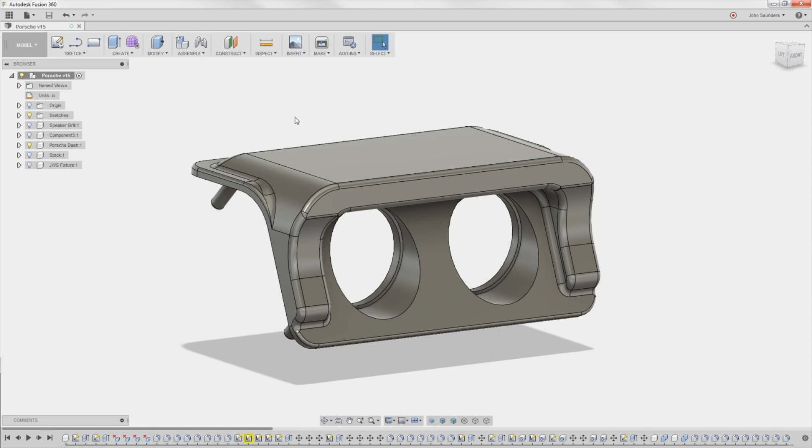So Keith, nice job. Unfortunately, it's so good that it's really got me stumped because Keith says, now I want to make the thing. So again, if you saw, we did an earlier video where we started talking about this, but these four plastic pins would kind of push into the dash on his Porsche 944. Here is, I believe this is the factory one, or maybe this was an aftermarket one that he bought as a test fit. And here were his original sketches.

So you can see the four holes, or the four legs, and some of the gauges that he's going to put into the one that he's going to make. And then there's the empty cavity, which, again, I don't know what was in there before. Maybe it was a radio. Keith will know.

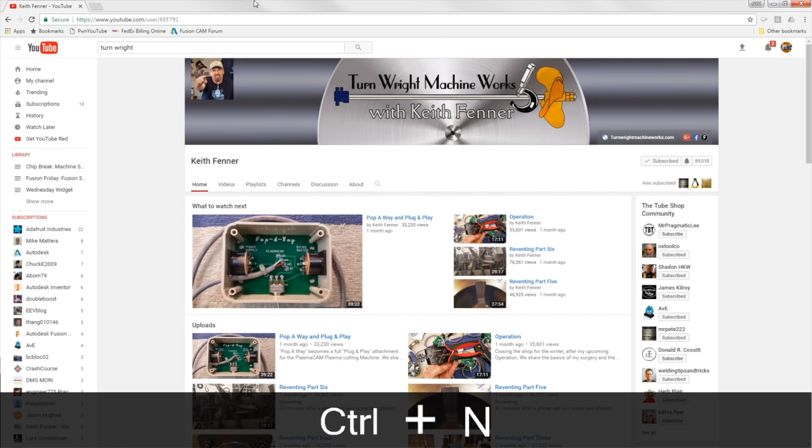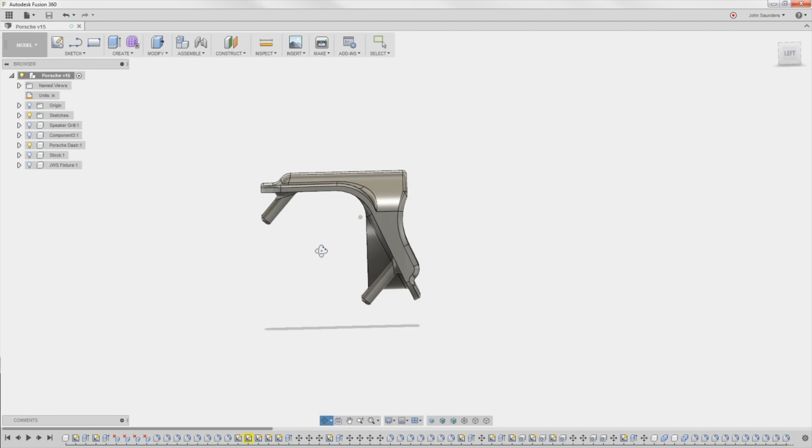The task at hand today is to help Keith understand the cam. And this is tricky. So I had to spend some time thinking about it. And one of the things I've learned that's a good mindset is try to remove the most material in your first operation. Now, that doesn't mean it's a steadfast rule, but it's generally the way to go. And I was thinking about this, and I thought, okay, so we've got to machine this big cavity in here, and then we'll have to machine this area up here, and then we'll have to machine this area up here. So I think it's a 3-op part, and that is what I've concluded.

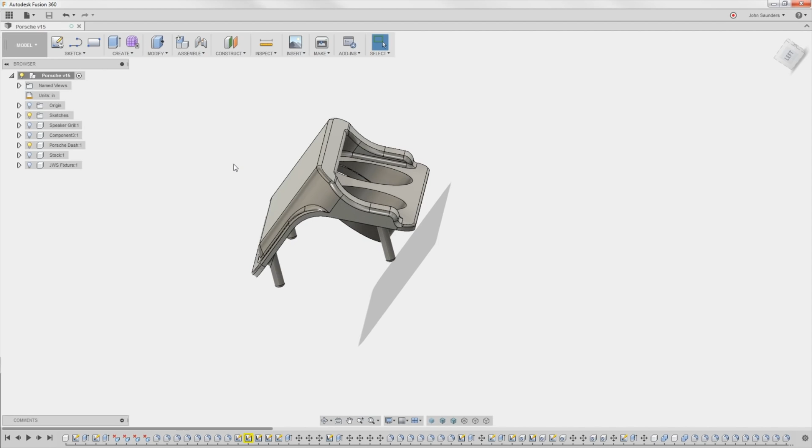But let's walk through, and folks, this is going to be a little bit of a longer video because I really want to take my time and walk you through how I think we're going to tackle it. And this is really to help you and to help Keith understand how to get started. It isn't necessarily going to be the cam or the code that he runs, but here's the thing, folks, we're going to actually ask you at the end for your help here. Keith has done a lot to give back to the YouTube and machining world, and hopefully this is our chance to give back to him because I'm not sure I'm coming up with the best strategy here. But let me show you what I got.

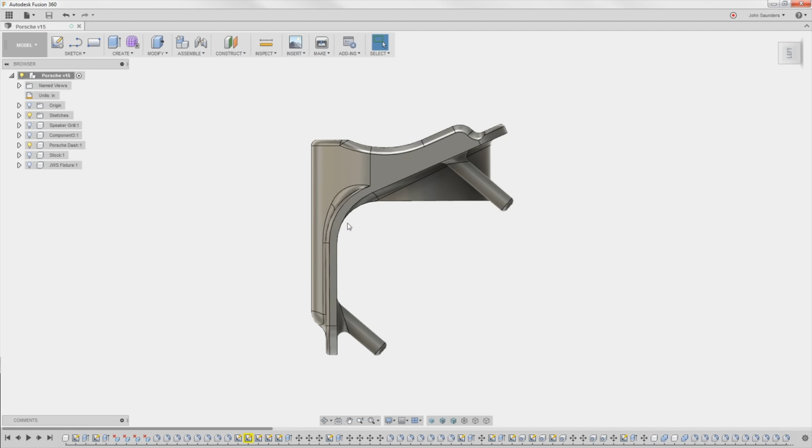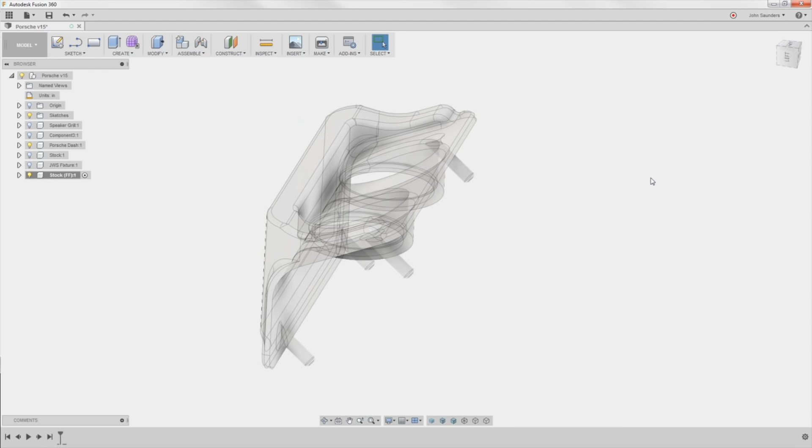First thing I want to do is right-click, New Component, and I'm going to rename it Stock for the Fusion Friday. But we're going to model up the piece of stock for a couple of reasons. The first is I need to figure out what to buy or what to tell Keith to buy. So the stock component is active. I'm going to hit R for rectangle, and I'm going to click that plane right there.

So I can't click it from this view, but if I hold my mouse over that area and then click the left mouse button, the normal mouse button, and hold down, I get this pop-up which gives me a few options. I want that YZ plane, which I don't always remember that it's YZ, but it pops up in the highlight, which is good. So now I'm sketching a rectangle on that plane, and you know what? The problem with a rectangle is it's not really the shape that I want. It's kind of oriented the wrong way.

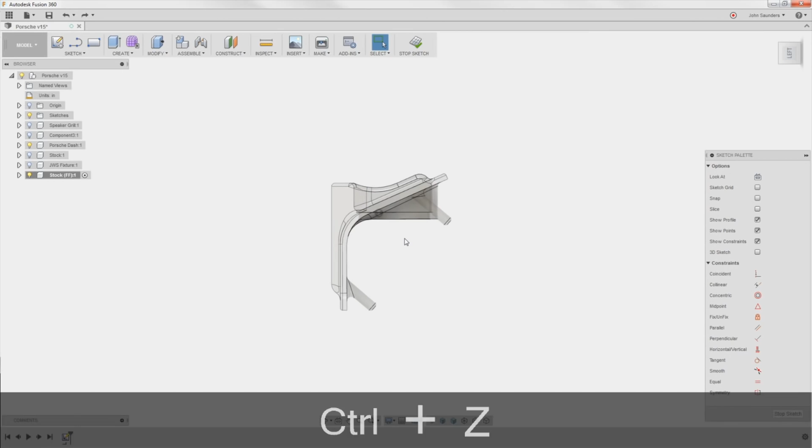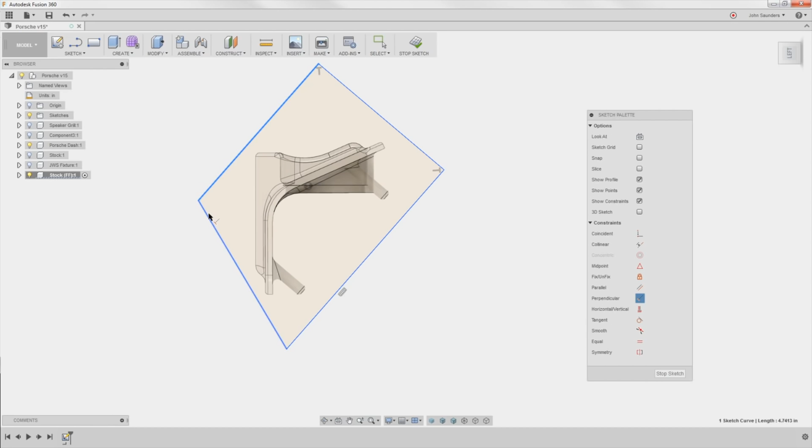So hit Control Z or undo, L for line, and I'm just going to sketch some lines around it. Now don't get hung up on these being perfect, because what I'll do now is say perpendicular. I want this perpendicular to this, this. So now I've got a proper rectangle, right? This should over-constrain it. Yeah, that was more than I needed to do. So I'll go back to select mode.

So I can kind of start dragging this around to understand, because this is going to be the most efficient piece of raw material to buy. So buying less raw material is good, and less to machine away is good. I want to kind of space it off the part to get an understanding of how big it is.

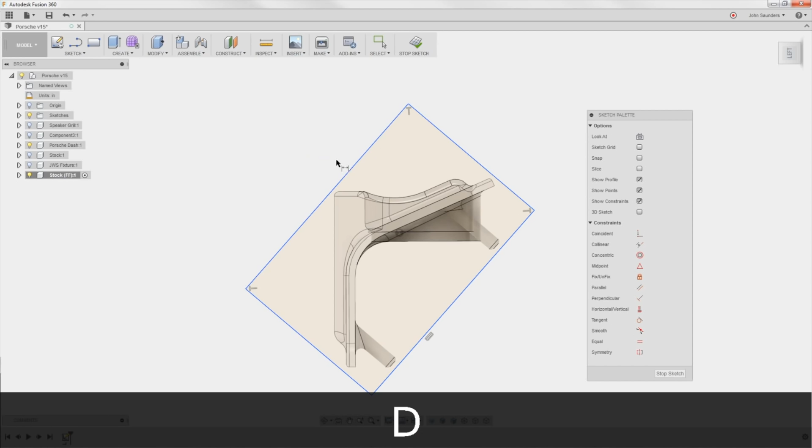Because right now, if I do D for dimension and click this line, I say, okay, well, we need a 5-inch part. Ooh, is that going to work? I don't think it did, actually. See how it's hard to kind of see? Ooh, actually, that might work. Yeah, that's awesome.

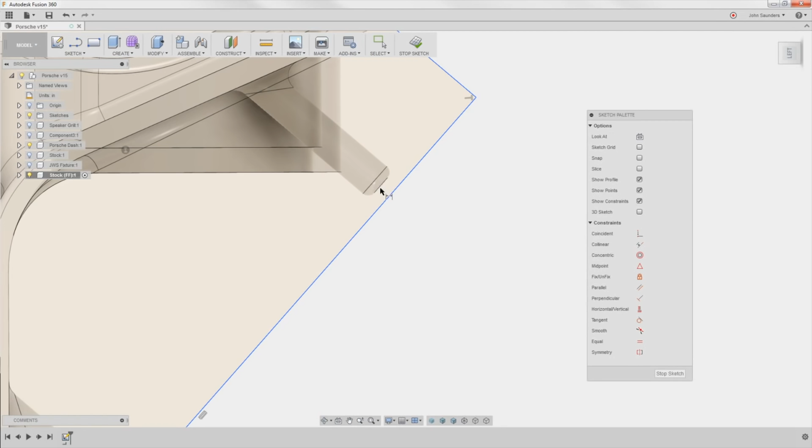D for dimension. If I click on this, see, I can't click on the bottom of that pad or that leg. So we're going to do something called project. Hit the P key on your keyboard, or you can go to Sketch, Project, Project. This is one of the coolest things in CAD.

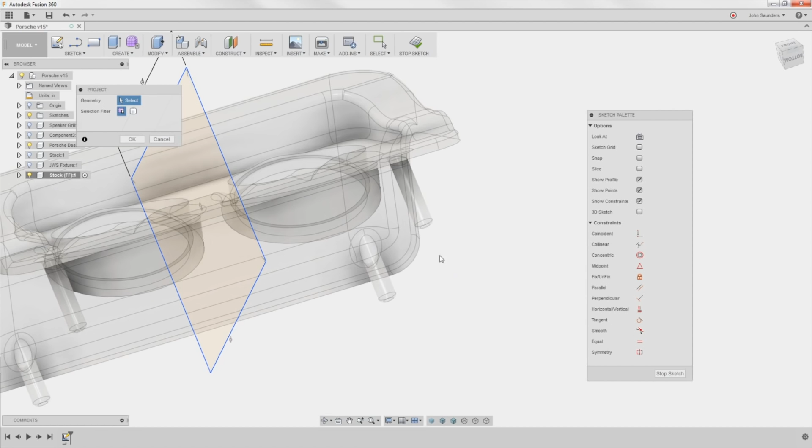So the reason I can't click on that foot is right now I'm sketching on a plane that you see where this rectangle is. Well, those feet don't exist on that plane. They're over here. And so if we look at it from a side view, I see them, they're right there. But again, when you start to orient the model around, you see, okay, well, they're not there. But if I click

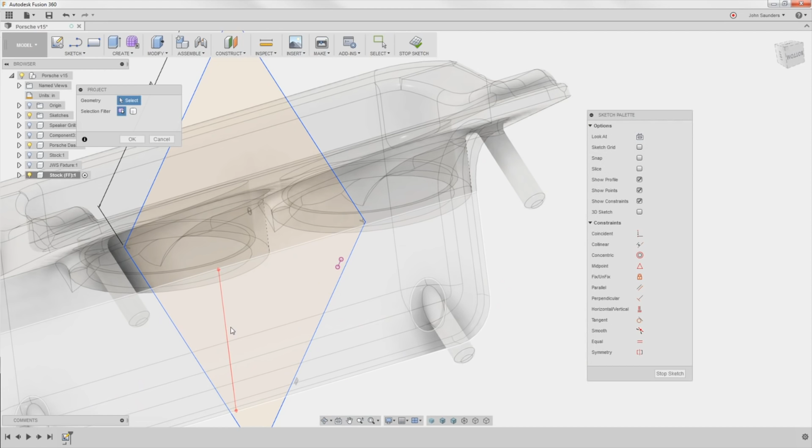on the bottom of that foot, like so, it projects what will end up being a straight line. Why is it a straight line and not a circle? Because it's only giving me a projection of the intersecting geometry. Does that make sense? It's pretty cool. And it's purple, which means it's linked back to the foot, which is good. If I happen to have changed the foot, it'll update that. Not really a concern here because this CAD model is pretty well done.

D for dimension. I'm going to click the bottom of our stock, and I'll click the purple line, and that'll let me say I want at least 50 thousandths of an inch off of that. And I can now dimension this, and we'll say he'll probably have to buy a 3.5 inch piece of material.

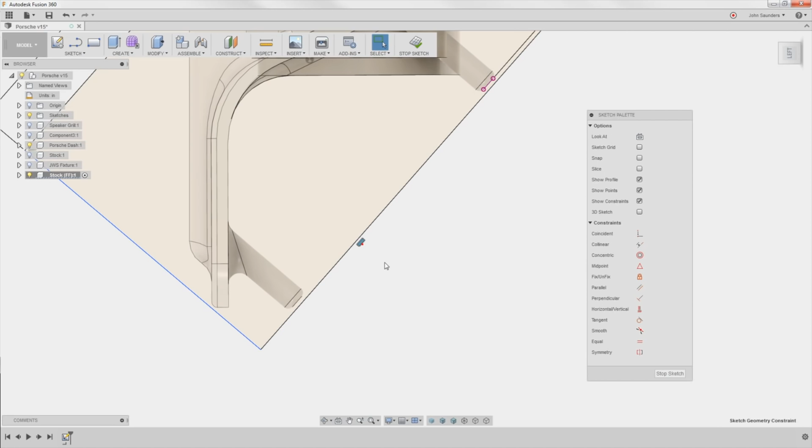Now, the other thing that's really important is I don't remember doing anything to make this square to our part. It might be, but the other thing we could do to make sure of that is parallel between that projected line and our stock. I think it's going to tell me it's over constrained because it already is. So no worries.

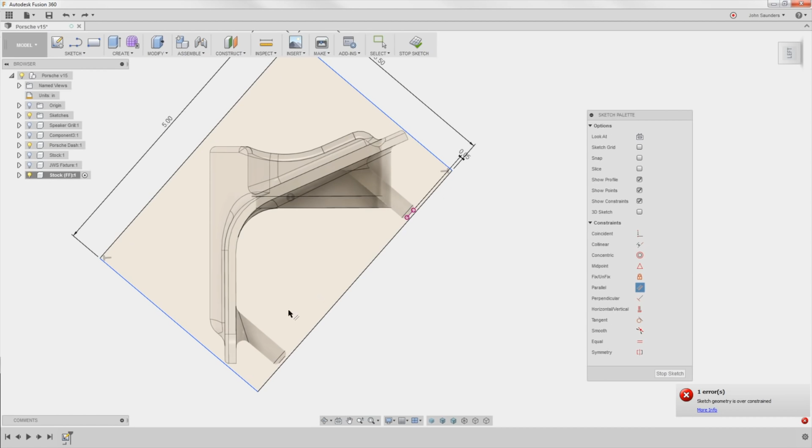Now what I'll do is D for dimension, from this point to here, just to kind of lock in that location of that stock so it's all black. Being all black is important because that tells me our stock isn't going to move. So I've got this rectangle that represents our stock right in the middle of my part.

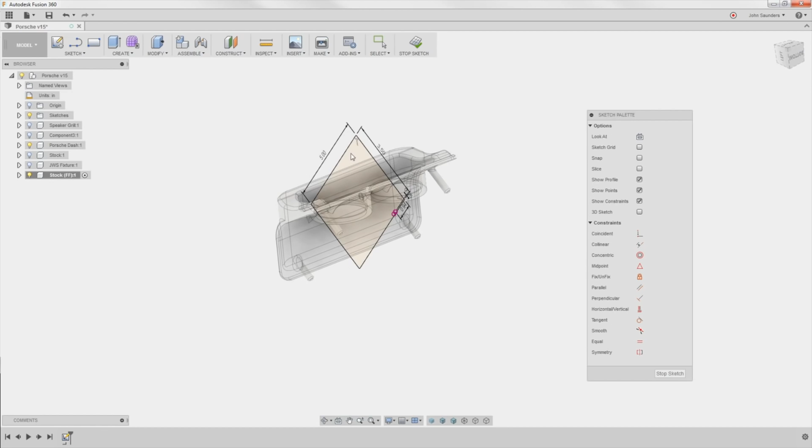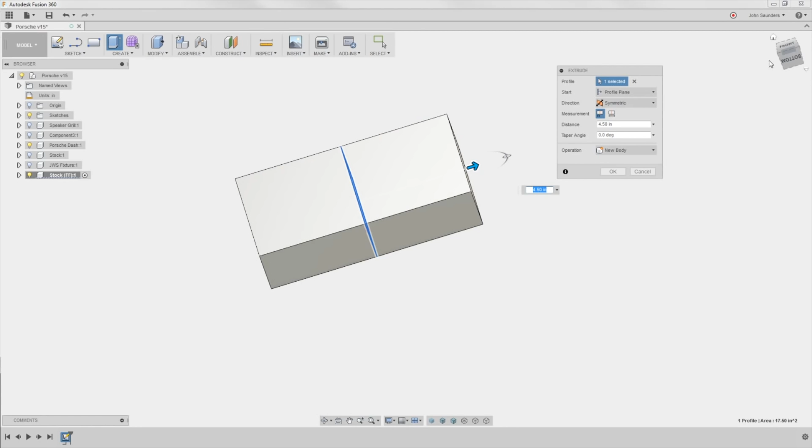E for extrude. Click on it once. And if I drag this blue arrow now, it's just going to go one way. I want it to go both ways, so I'll change direction to symmetric. And now it's pretty cool, I can just drag it out and take a look. How big do I need it to be? Is 8 inches going to cover it? Looks like it does, actually. I'll click OK.

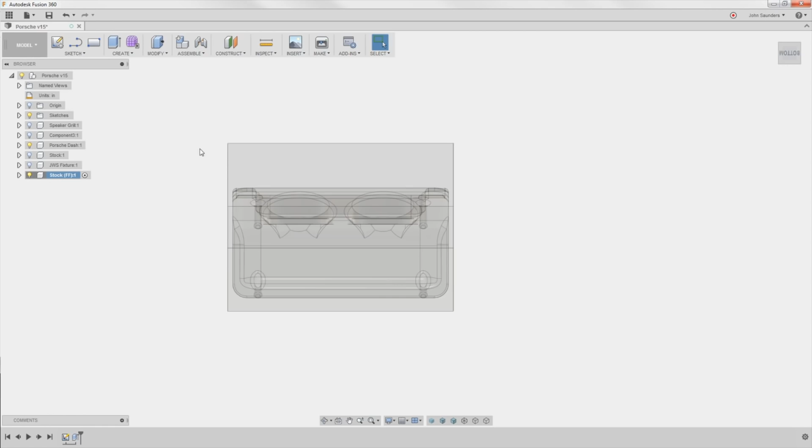And I can actually right click on this stock, opacity control, say 30%, and I can now see Keith's part inside of that stock. So that should work. So now I know Keith needs to buy an 8 inch by 3.5 by 5 inch piece of, I think he said he's going to use Delrin. Cool.

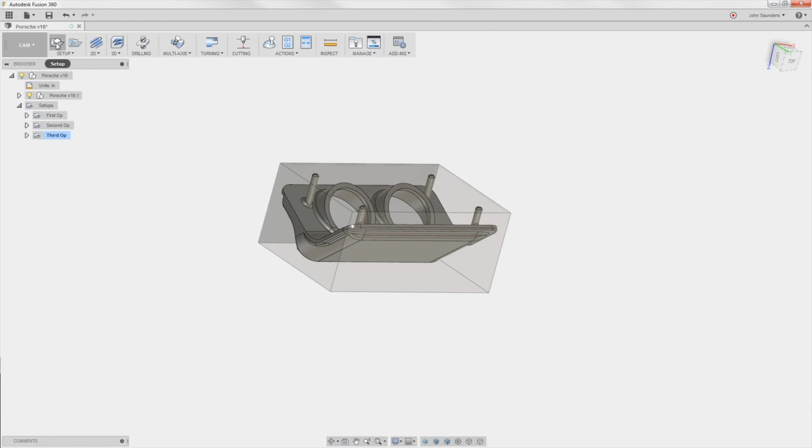Let's start making some CAM chips here. Switch from model to CAM. And this was my attempt last night, so we'll start from scratch here. First, I'll click a new setup. And excuse my Fusion, I've got some errors here. We're going to change our stock to from solid, and I'm going to pick that stock that we just modeled. So how do I get to it? See right here, this icon,

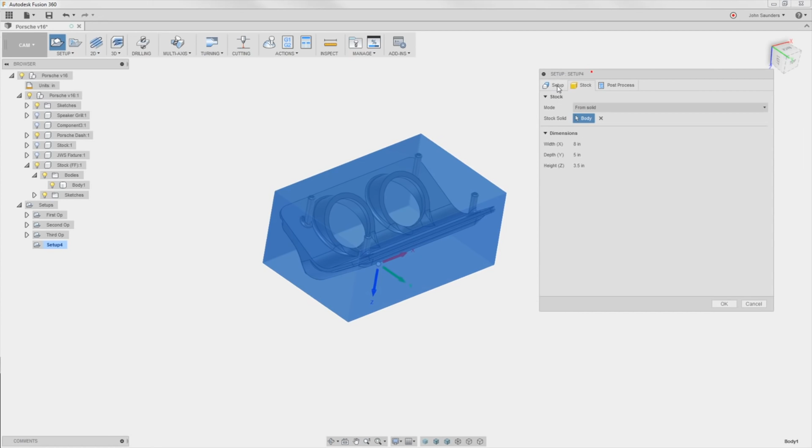And again, we're going to machine this underside first. So back in setup here, the first tab, what is my orientation? Well, this is the wrong way. I want it pointing up. So if I click the tip of the Z, the blue, that flips it up. And if I now say stock box point, see over here, I'll choose box point, and I would probably pick the top left corner of it.

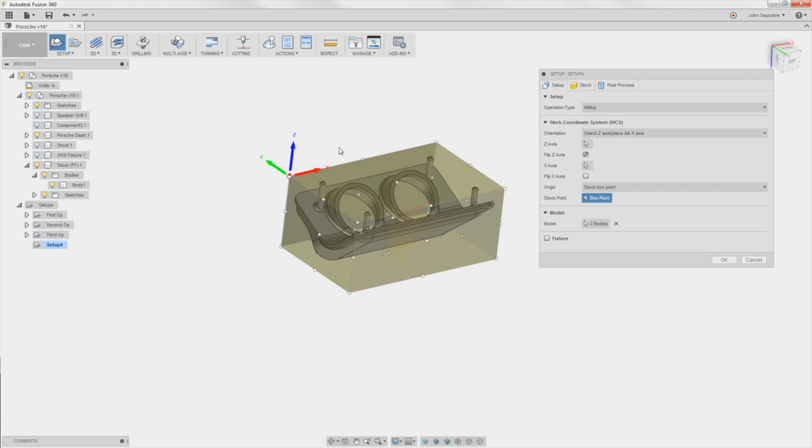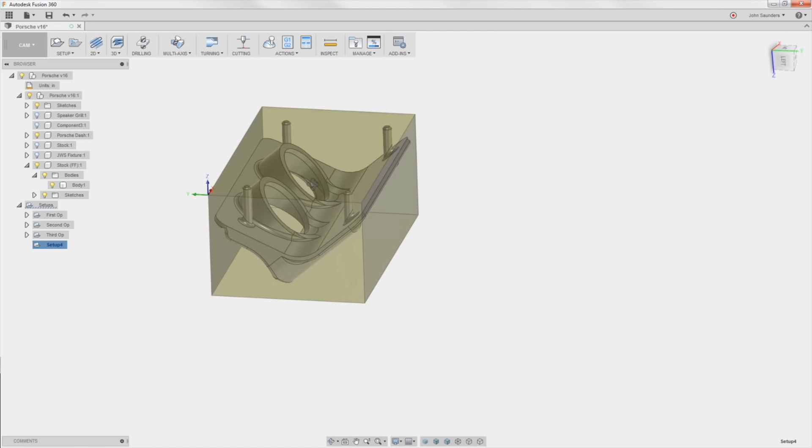So that looks good. The other reason we're going to machine it this way, and I talked to Keith about this to see if he agreed, is our second and third ops, or Keith will make rather, a fixture that we can stick these 4 pins into. We can probably even drill and tap the centers of those. And then there's actually some creative things we could do with even like an expanding foam or urethane to help secure and add rigidity to this part after this area is machined away.

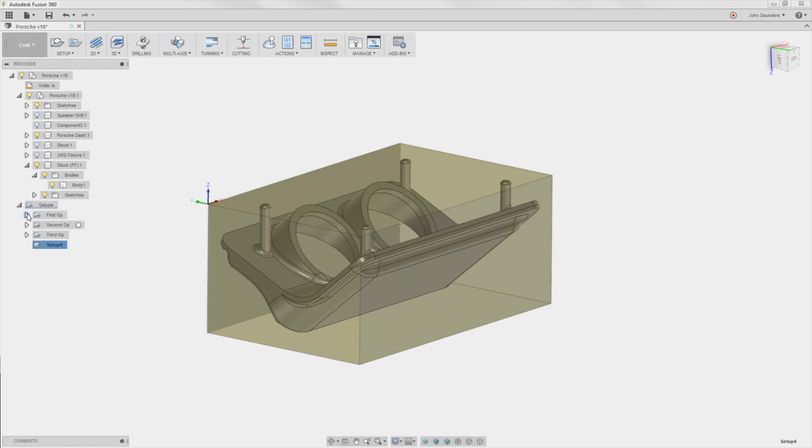Keith was talking about making this on his plasma cam, which he has a router attachment for, but it's got ER11 collets, which don't go very big. I think the largest collet size would be 5/16. So when I was playing around with our first operation, which is what we're working on right now, I was really getting frustrated because it was just creating so much toolpath. It was taking so long to compute. And I realized, well, ignore that. That's not the battle we're trying to solve right now. So from a CAM philosophy standpoint, I'm kind of ignoring the realities of the machine for a second.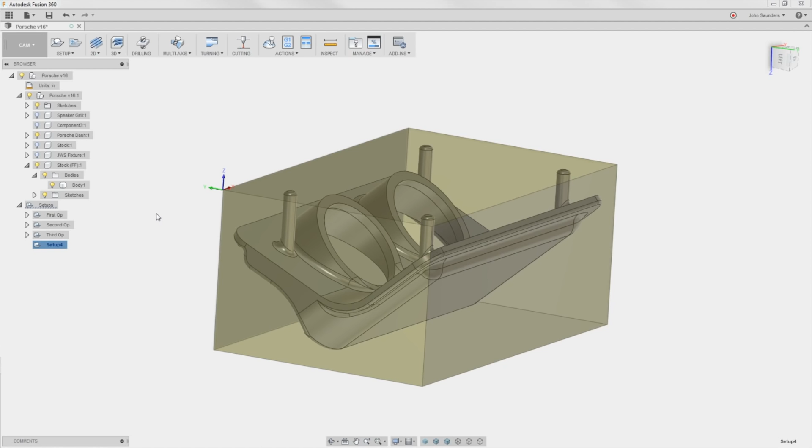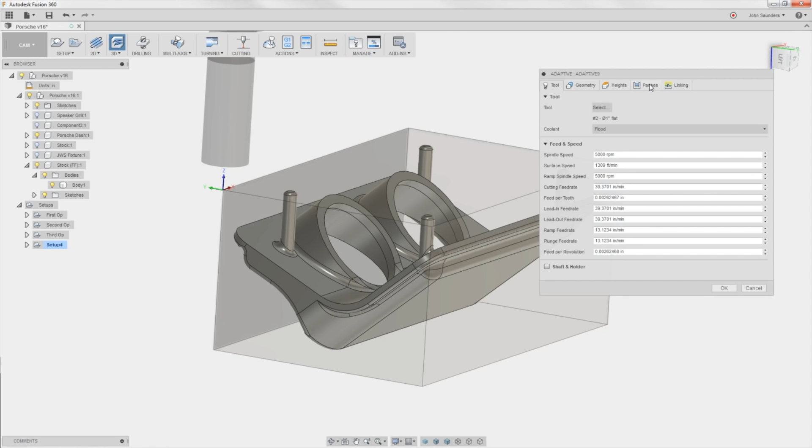And instead, let's just go 3D adaptive clearing. And so instead of picking a 5/16 inch flat end mill, which is the biggest tool Keith's going to be able to use, let's get the CAM process nailed down. Let's decide what operations we're going to use and make sure the part gets it done correctly. And then we can come back and switch these out to the smaller tools, which take a little bit longer to calculate, and it looks a little bit noisier. It takes longer to simulate. So 1-inch tool, let's just click OK, see what we get.

So why am I getting an exclamation point here? This one is a tough one. I don't know how to tell you to debug this other than to say when I get an error on an adaptive and I'm just like, why is it? That doesn't make sense. Go back to your setup, edit, and take a look at what's in your model. So this is important because this is what Fusion is looking at to decide what to machine. See, that's the stock. I don't want that. Actually, turn the stock off. I just want Keith's part, just that guy.

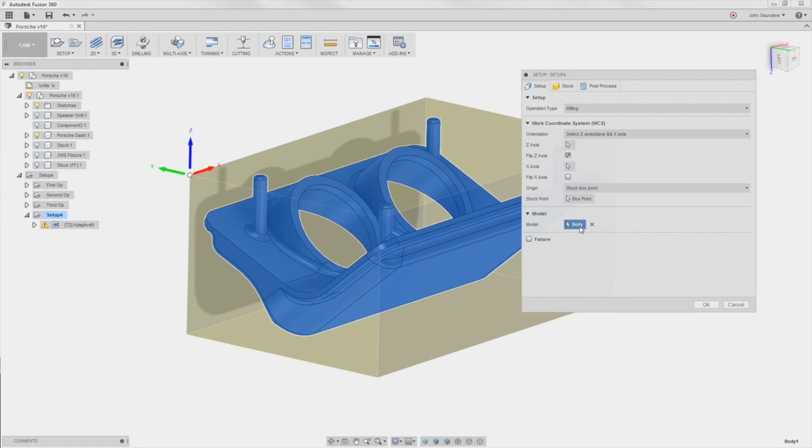But when I had the stock picked, it thought that was the end product. So it's like, well, if you're giving me stock that's the size of this rectangular block, and you're also telling me that that's the model in the end, well, there's nothing left for me to do. So I just want the model to be this. This is a really common thing we'll see from folks that reach out to us for help, say even on Patreon, and say, all of a sudden my Fusion doesn't work. Usually they need to come back and check what's selected in their setup model. Click OK.

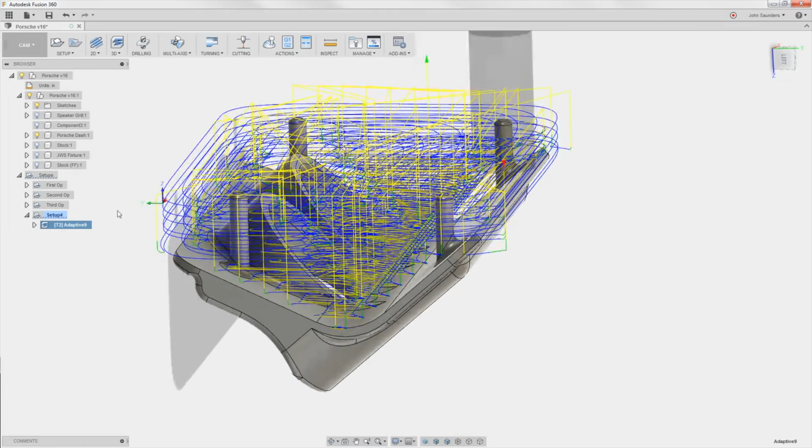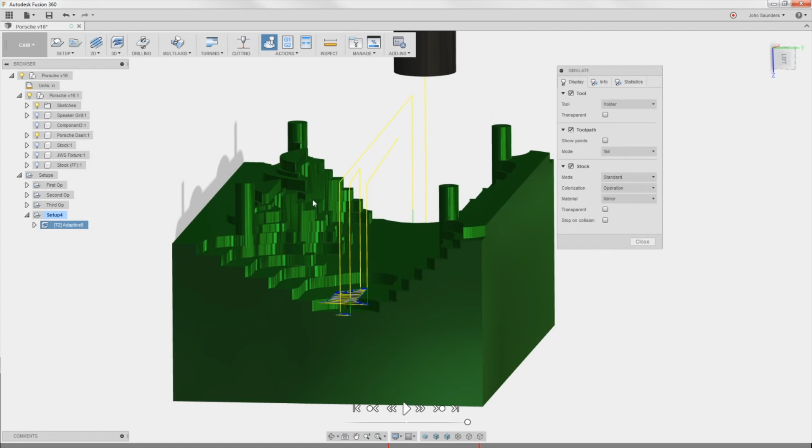Awesome. I like it. Still a lot of noise, a lot of toolpaths, but had I done a 5/16 tool, it would have been even worse. And that is what Keith's going to have to do. And you know what? That's okay. I love pushing machines to or past their limit. So let's do a simulation. Click on stock, click play, and kind of just fast forward through. So that first is a true roughing operation. It's going to stair step this down. We can start to see the posts form, but obviously a lot of work left to do.

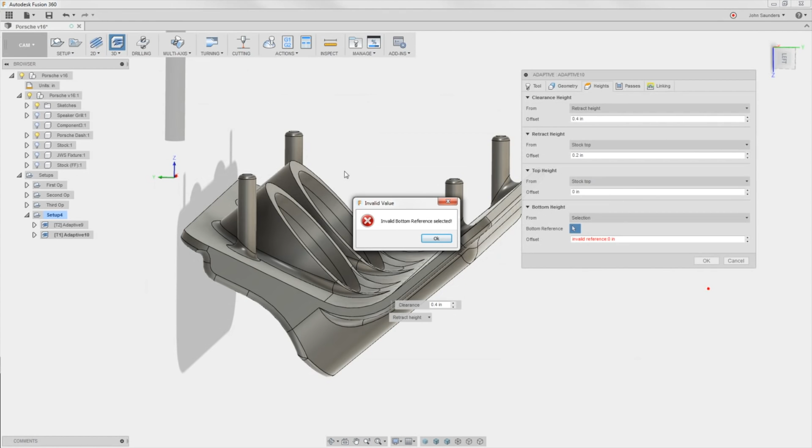That's okay. So let's do a second adaptive. This time we'll do 3D adaptive, but with the 5/16 tool, which again will probably be the one that Keith has to use the whole time. And I'll just click OK. Sorry, model bottom. Try to get that fixed.

So that's no good because look, it's cutting a bunch of stuff that we just cut. So right click, edit, geometry. See this thing called rest machining? Check that and then change it. I wish the default would be changed, but you want to switch it to from previous operations.

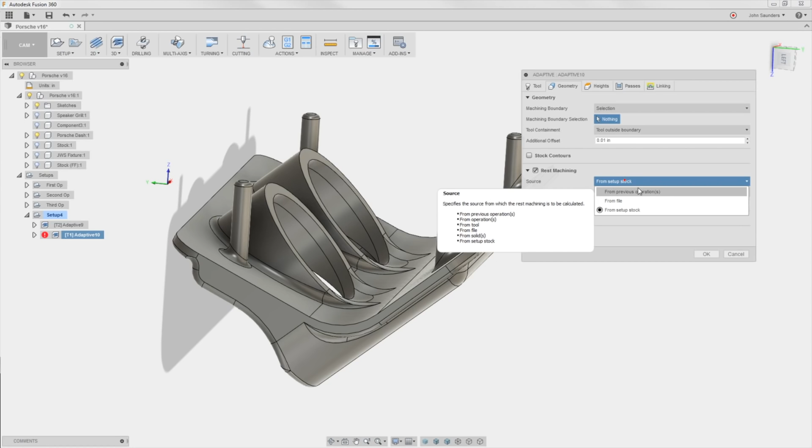So what is this doing? It's saying only machine the rest of a remaining stock is apparently what rest stands for, not just the rest of the part. Remaining stock from this previous one. So click OK. Now this is going to take longer to compute because Fusion has to look at what happened in the prior operation, but it's also going to create much fewer toolpaths because there's less material to work with, which is great.

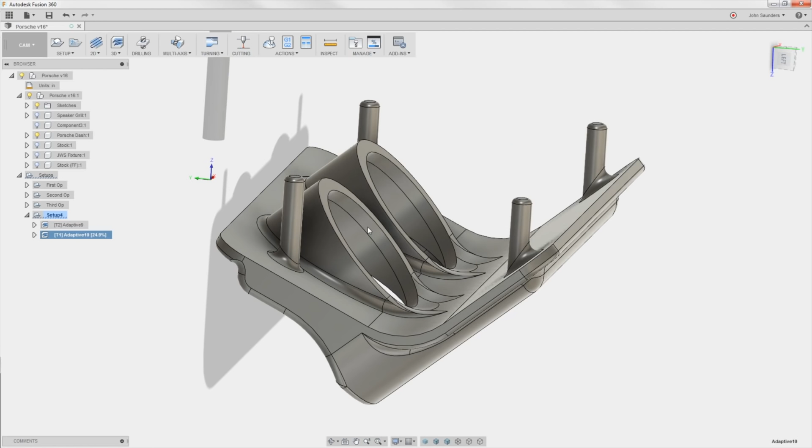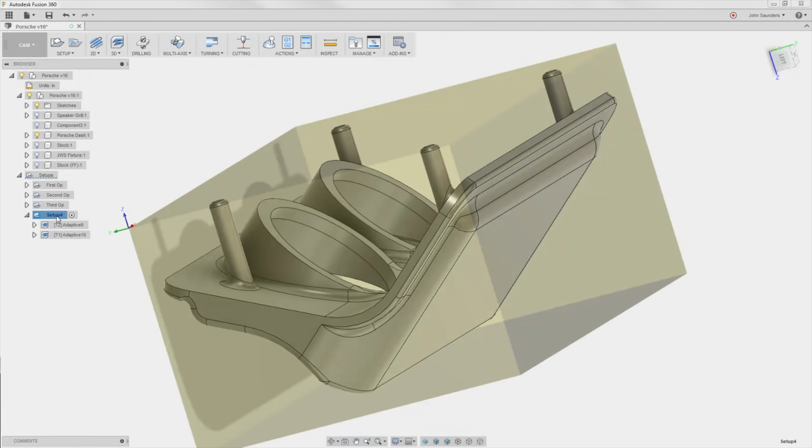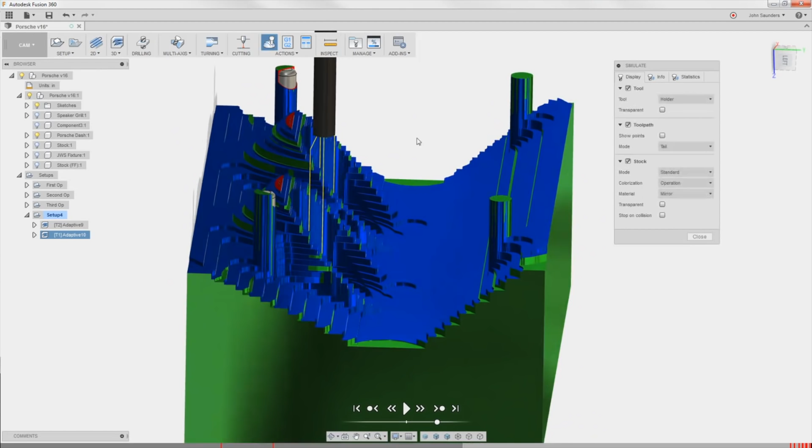So here we've got the 5/16, which is now doing even less work, which is great. And if we just take a look, click on setup, simulate, and I'm just going to click the go to end of toolpath, which is going to fast forward through everything and see where we're at. Awesome. So we can start to see this is looking more like the interior. We still have some stair steps, but we can see the pockets and so forth.

So this was really bothering me. I just rebooted my computer because I was thinking, what is wrong? Why am I getting what appears to be a crash or a toolpath that is going through the two legs back here?

And it's funny because when I was on the phone with Keith yesterday and we were joking about crashing machines, not in being a crazy cowboy way, but just, stuff happens. Like, you got to do it.

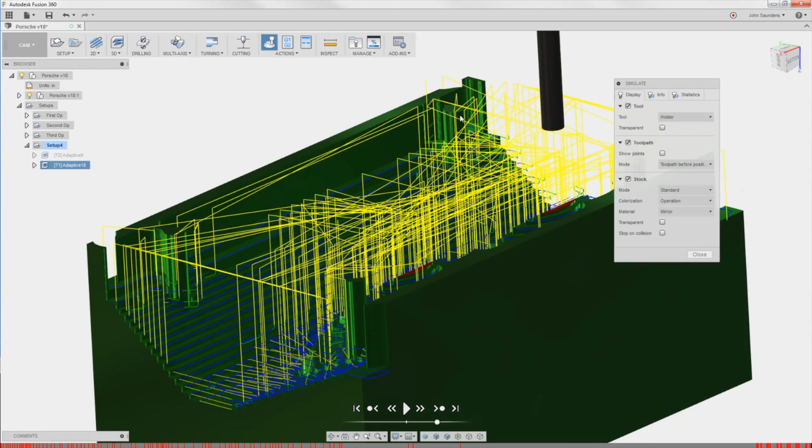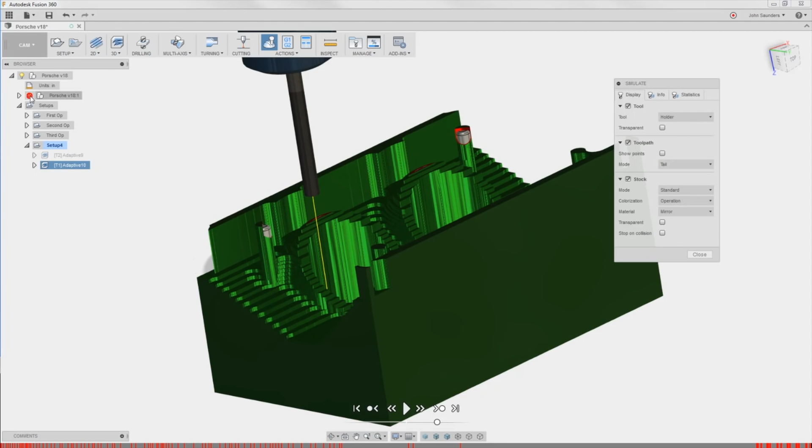And here's what I was talking about. You can see right here, the stock is gone and the model is backfilling it. So first off, that's a really good lesson, especially if you're new to Fusion: when you're using the simulation, turn off the light bulb of your model right here. That's going to show us more easily what the simulation is actually doing. And here, sure enough, it is machining through those two pegs.

And I thought, what? How was that doing that? I spent a few minutes looking at the toolpath, zooming in and trying to figure out. And I thought, man, this must be a graphics glitch because I don't see any blue or yellow line going through there. Now, I was missing one really obvious clue. Anybody know what that is? Take a look. What's the shape of that stock that's showing it's being cut away? It is the shape of the tool holder. So Fusion is actually correct here.

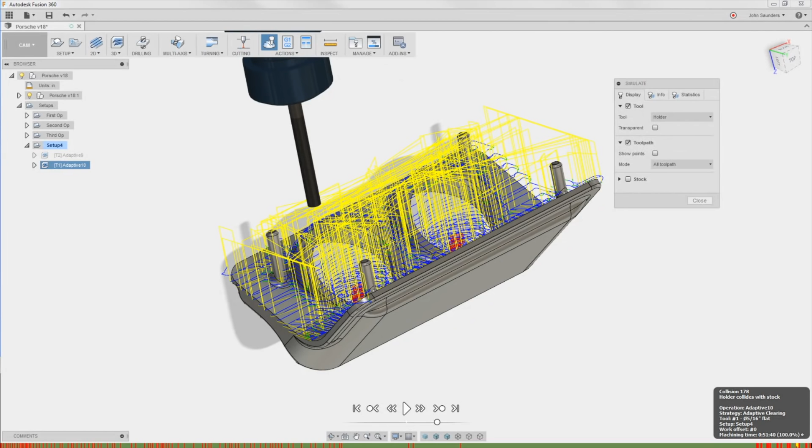And the other way to look at what happened is, let's turn off our stock. I know it happened toward the end when I'm getting some of these collisions. And sure enough, look at the collision. If I hold my mouse over that little red tick, it says holder collides with stock. So watch, look at that. Go back to tail here and hit play. That's what's happening: right there, we're machining too deep relative to the shank of the tool, and it's hitting that pin. Great thing to know. Very relevant, and that's how you avoid crashes.

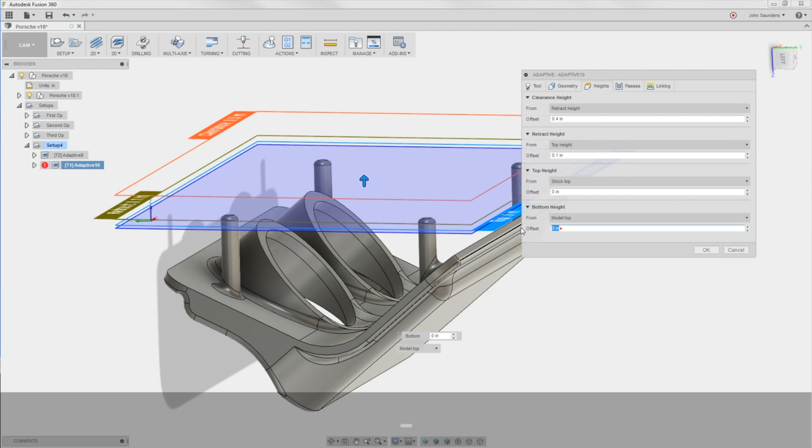So right click on the adaptive, edit, heights, and let's say we've only got 2 inches that we can machine with this part. I'm going to change my bottom height to be model top, which doesn't sound right, with a negative 2-inch offset. Click OK. That's now going to stop it from going too deep and should solve that problem. Regen the toolpath, simulate, show the stock, fast forward through everything. Great. I can now see that's not happening.

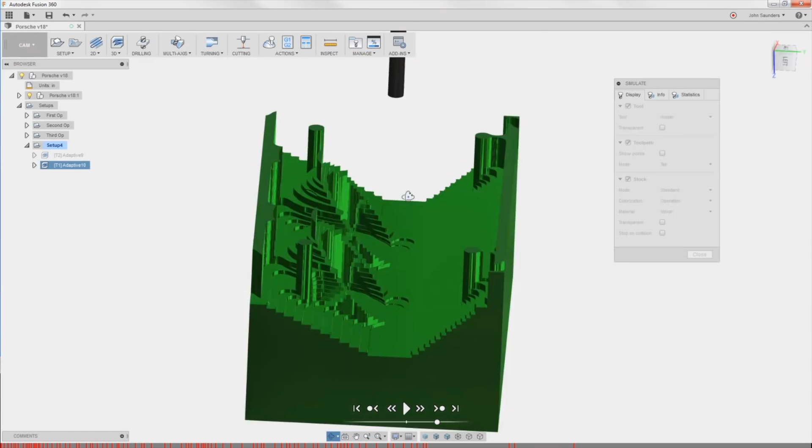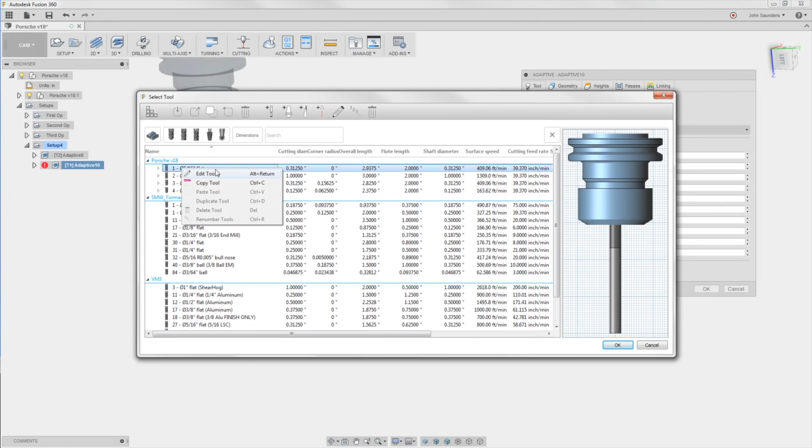I like it. This comes back to your tool library though, and how we have our tools set up. So on this 5/16 end mill, let me slow down here. Right click, edit, select the tool, tool 1. I right click, edit tool, I can now see what I've modeled as the flute length and as the shoulder length. So your flute and shoulder, and then the body length.

So normally I would say the flute length is what you can actually cut with, and the shoulder length would be how much basically I would think is sticking out of the tool holder. So I will probably change body length to be 2.3125. And that's going to help. It's really important here for Keith because Keith's going to have a really long stick out, and he's got to be conscious of the tool holder hitting other parts of the model itself.

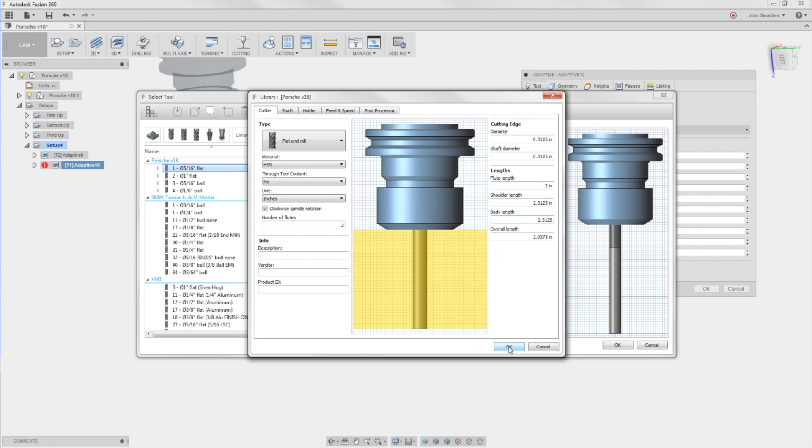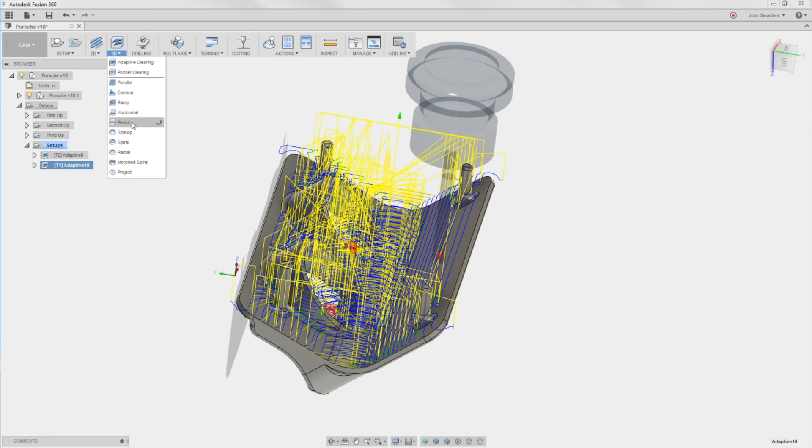After we're done with these sort of 2 roughing operations, we need to get some 3D surfacing done on the interior of this. And again, folks, I really want to see what you guys come up with this. Am I wrong? Are there better ways to do it? And hopefully we can all learn and take away some tips and tricks. I'm going to go ahead and say 3D scallop, and we'll pick a 5/16 ball end mill.

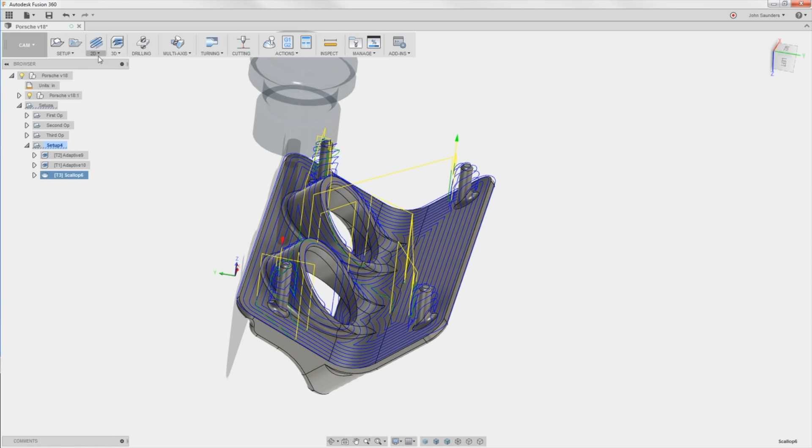Click OK. And again, with the 3D operations, I tend to just click OK right away and see what they come up with. That differs from the 2D operations, where 2D you have to first tell Fusion like a face or a contour or a line what to do. The 3Ds basically rely on the solid model, and you create exclusion zones, or you click on things to control where it goes. So this isn't half bad. You start to see it's walking all the way around that part.

What did I do last night to change it? I think I really just reduced the step over. Let me take a look. Ah, that's right. That's what I did. So one of the easier ways, like I said, 3D toolpaths are all about toolpath containment. It starts with a big toolpath and you do things to reduce the area where it does work. The easiest way, like I said here, is avoid touch surfaces.

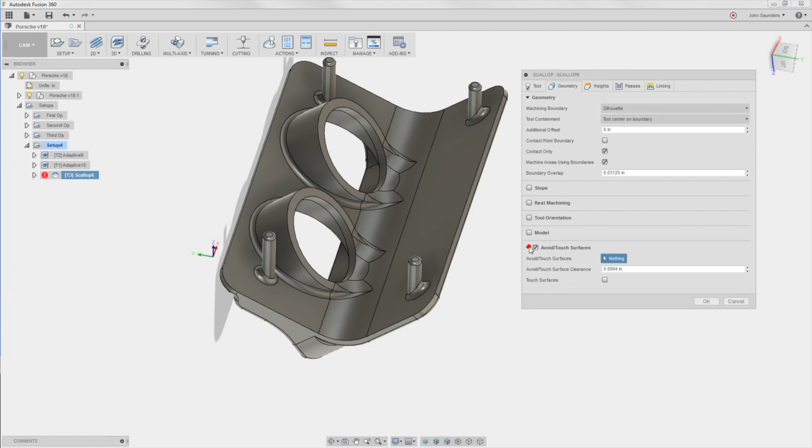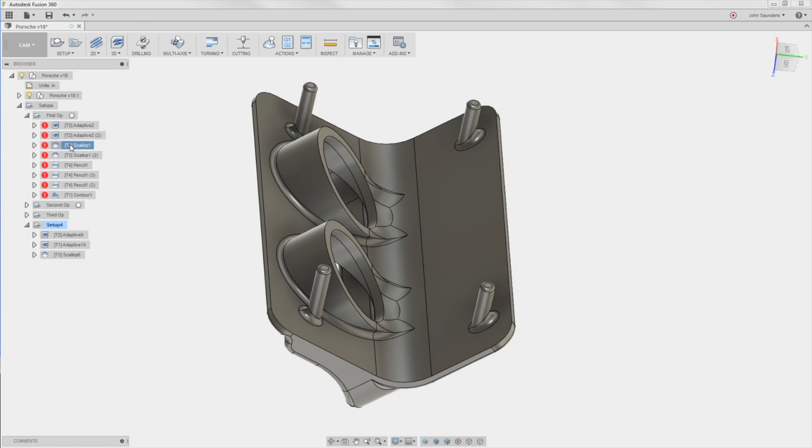So I'm going to click that. I'm going to click these 1, 2, 3 faces. And in this case, I don't want to avoid them. I actually want to touch those. I want to do work there. Click OK. I want to eventually reduce my step over. See how wide of a step over that is? We eventually want to have it look more like this, a finer step over, which gives us less scalloping on the part, or it looks smoother.

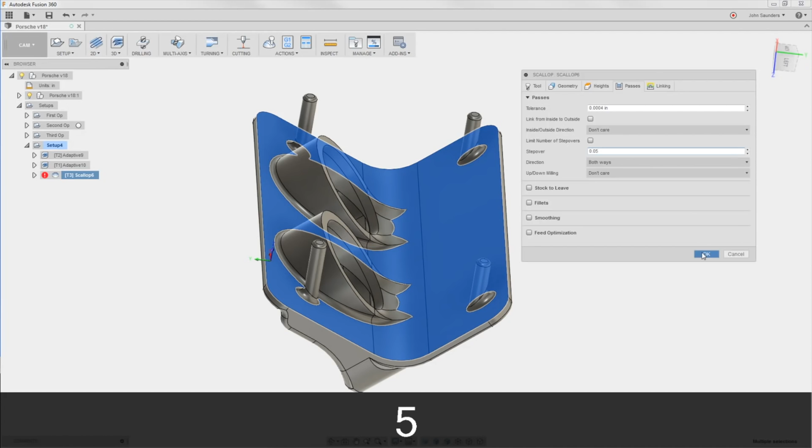Now this is also the inside of the dash piece, so Keith may not care about it being super smooth, but I would not. I would worry first about getting that toolpath to do what you want and go where you want, and then when you think you like it, under passes, change the step over, say to 50 thou. Click OK. It takes a little bit longer to compute, so that's why I do it at the end.

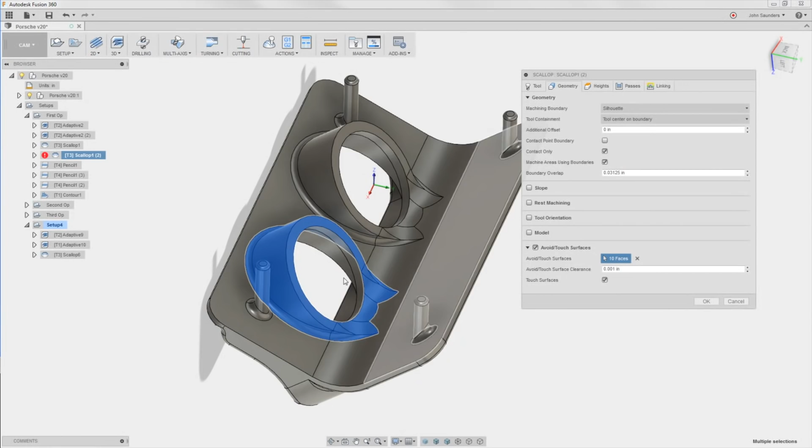Let's walk through the rest of what I did to finish up the backside of this part. So we did a scallop here. I did basically the same scallop to handle the inside of the gauge cutouts. So under geometry, just selecting all of those faces. Does anybody know, something that bothers me in Fusion is when I go to pick these faces, that's correct, that's correct. But sometimes when you hover to like right here and I click, it does the whole darn body. That's not what I want. Anybody know how to stop it from happening?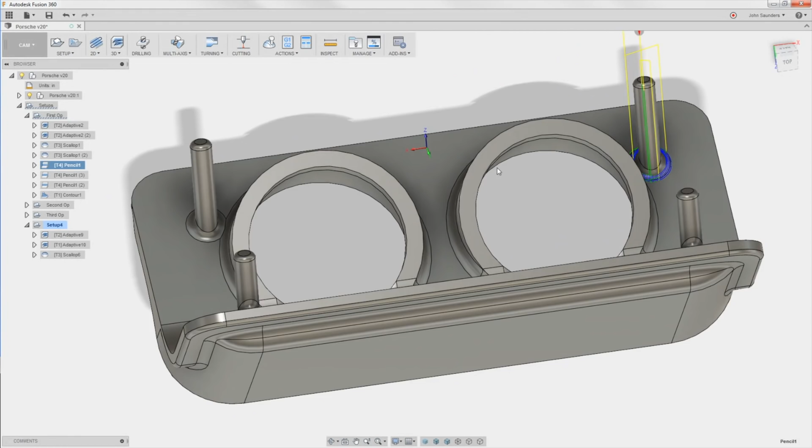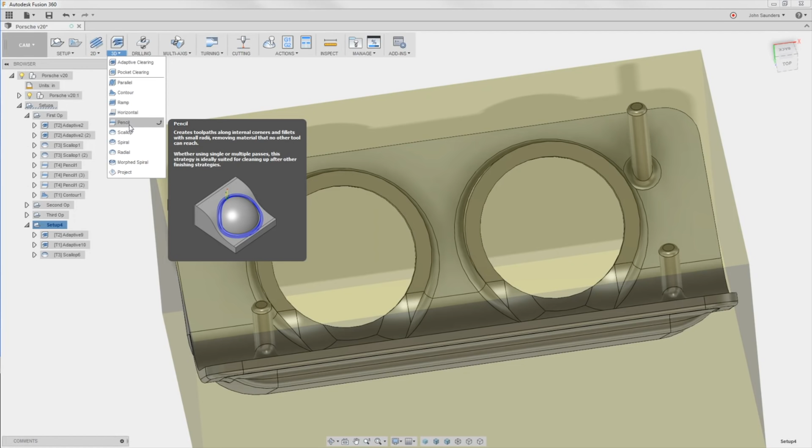And then I use a pencil toolpath. So pencil toolpath is awesome for taking, in this case, a 1/8 inch end mill and cleaning up some really tight little areas. And this is one where I, again, welcome input, welcome some tips to make this better. Let's walk through creating a pencil toolpath. 3D, pencil. If you read that pop-up, it's a great descriptor, too, of what it does. 1/8 inch end mill, ball.

And now you've got a really long stick out here, folks. I absolutely want to recognize that a 1/8 inch end mill sticking out 2 inches, that is 16 times diameter. That's the way I think most people talk about it. That is huge problems potentially. Now it's also plastic, and Keith will have a super high RPM, so we'll have to see how he handles that.

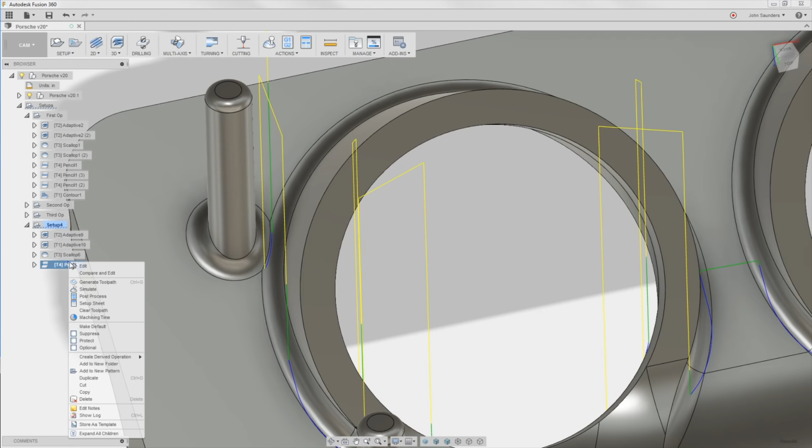So geometry, well, here, just click OK. See what we get. This will not be a good toolpath, but again, I'd rather start with something and work our way in. So I'm going to want to focus on this area right here. So let's do geometry, avoid touch, touch, and let's pick this. Click OK.

So all we get is this little bit right here. I wanted it to go all the way around like this. What's the difference? Let's just do compare and edit. I'm going to click on the one here that I know is good, so I'll call it pencil good. Hold Control and click on this one.

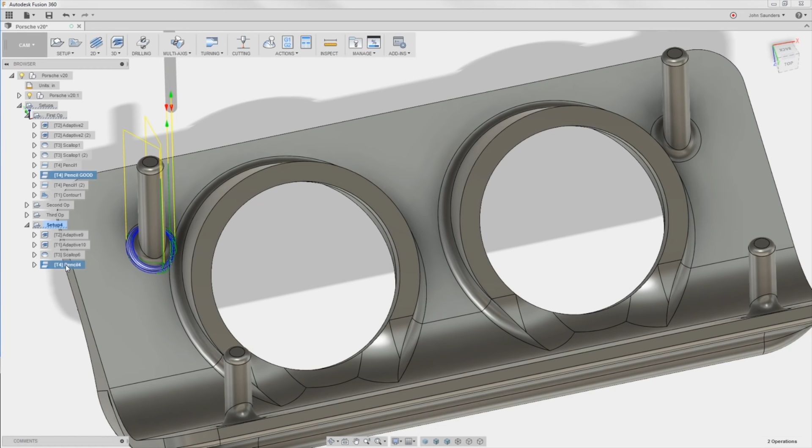Right click, compare and edit, and I'm going to change this here from all to different, and it's going to walk me through all the settings that I've got that are different. So I know the good one works, and this one doesn't. So additional offset, machining selection, number of step overs, over thickness, step over. Okay, you can edit them here. I'm going to walk you through how we edit them back in the normal way, sort of per se.

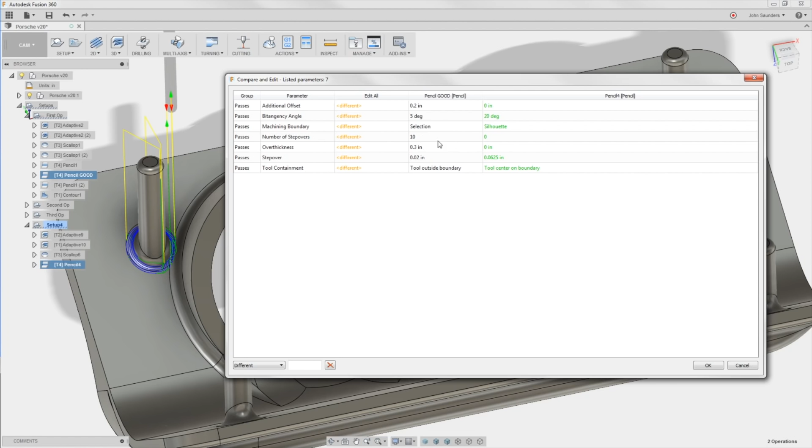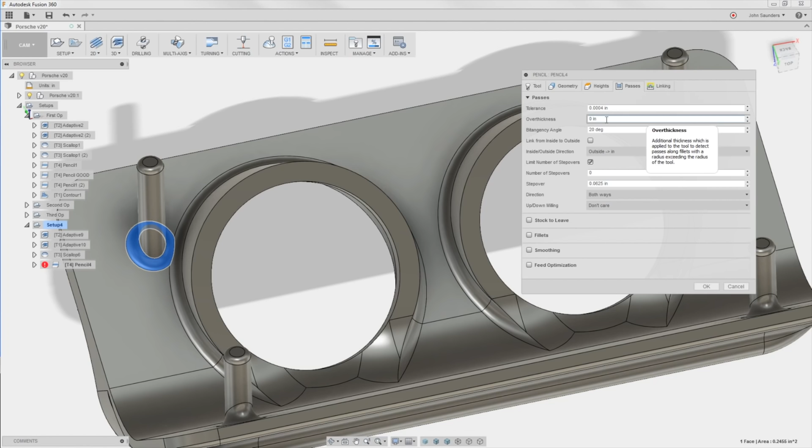Over thickness is, I think, going to be the key, and that's one that's a little bit tricky. You can spend a lot of time learning the nuances of these 3D toolpaths. Over thickness in pencil relates to basically, I want to machine a radius that's bigger than the tool radius. So in this case, I have a 1/8 inch end mill. I want to machine whatever that is, a 1/4 inch radius or something bigger. So I'm just going to put in some over thickness of 0.3.

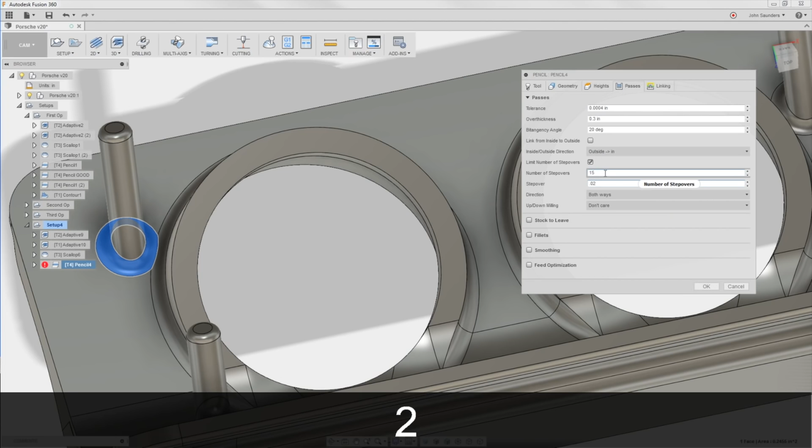The other way of saying that is when I use pencil, I usually put in some amount of over thickness and just see what happens. Good. So it's going around. That looks better. Let's do number of step overs. Let's just say 15, and we'll say a step over 0.02. Now it won't do 15 step overs. It'll just do up to 15 subject to the touch surfaces, which is pretty cool.

And this is how I learn, folks. You just play around. Yeah, you need to know enough to kind of say what are the important things to do. So I don't mean to make it sound like it's just easy and you just pick it up right away, but you experiment, you play. So look at that.

Simulate. Let's take a look at what that does. It comes in, it's going around, walking around there. I don't know why it does a lead in or out there. It shouldn't have to. Cool. Starting to look like a good toolpath, right? Or better. It would be nice if it was not doing all these linking moves in and out. Anybody know how to improve that?

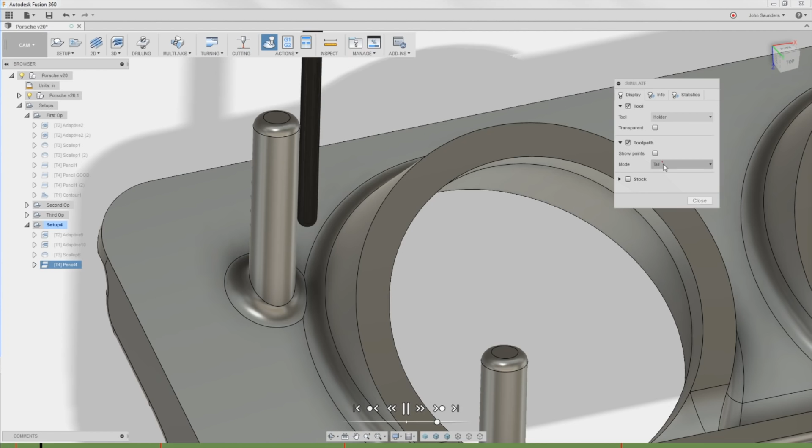If I change the heights, if I change my retract height to be just, say, 100 thou from the top height, I wonder if it'll still move in and out of the cut, but instead of coming all the way up to the top of this post, it'll just come up a little ways. See if that did it. I don't think it did. Nah, it's still coming in and out all the way.

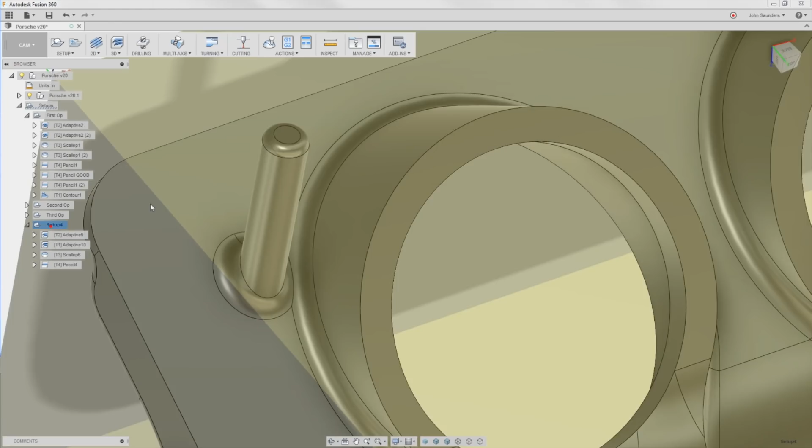You got to be careful playing with your heights too. That is a great example where you can crash. We got a collision warning here. What is it? Rapid collision with stock. That's odd. Oh, you know what it is? There's probably some stock left. I love it. I love learning this stuff. There's probably some stock left when we get to the pencil. Take a look. So I'm simulating up to the pencil.

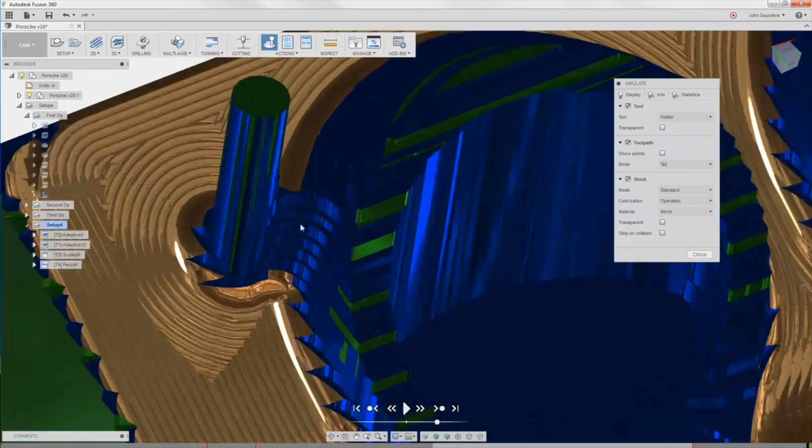And so sure enough, look, this is what the part should look like on Keith's machine when he starts the pencil operation. Well, there's all this material buildup here that hasn't been cut away yet. So that's really good to know. Maybe we need to do an adaptive in this little area to rough that out before we come in with the pencil. It's Delrin, it might be okay. On the flip side, a 1/8 inch tool that long could have some trouble with it. And if it were aluminum or even wood, you might have a real problem.

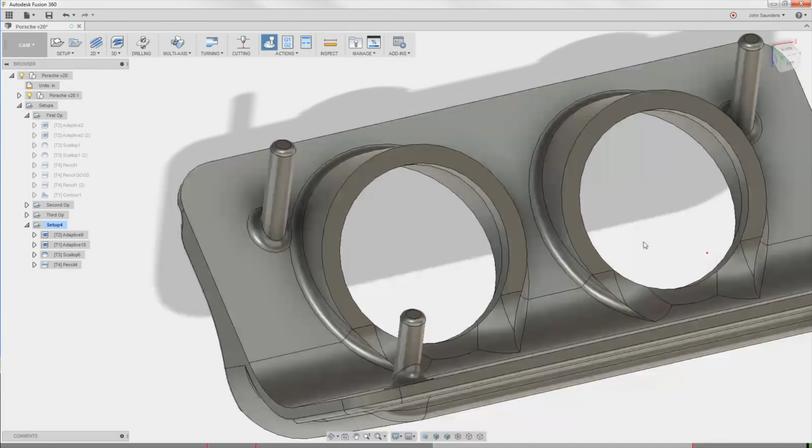So, folks, this is a longer Fusion Friday. Let's wrap it there, but we'll do a second part now where we walk through finishing up this Op 1 and then how we move to a fixture in Op 2 and 3.